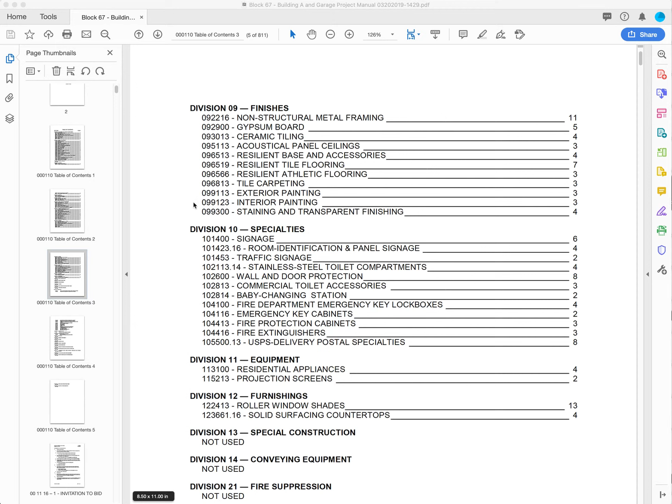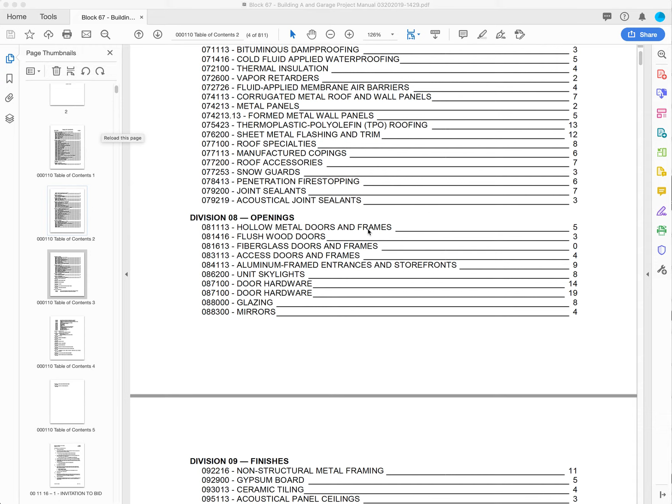There's also a section on wood, plastics, and composites—you can see all of these here. Then there's one on openings, so we've got hollow metal doors and frames, flush wood doors, fiberglass doors. This is just an example of what it could look like.

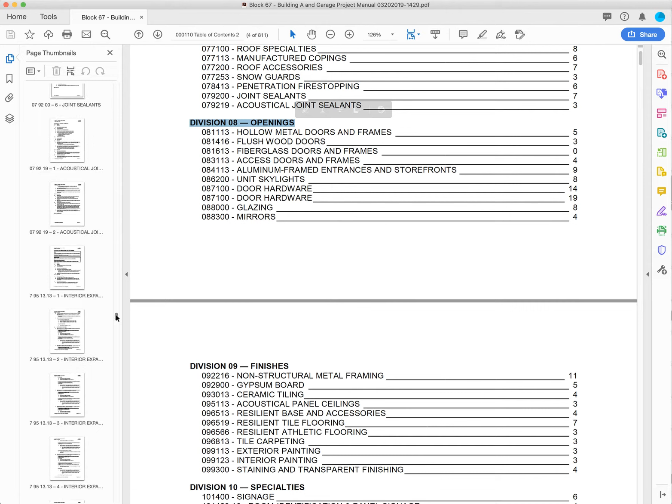So I'm going to hop down to Division 8 and show you what it looks like inside a specification section. I've got a bit to go here, and I'll probably just jump on the first spec I see, because once you've seen one, you've kind of seen all of them. So here is a specification for an overhead door.

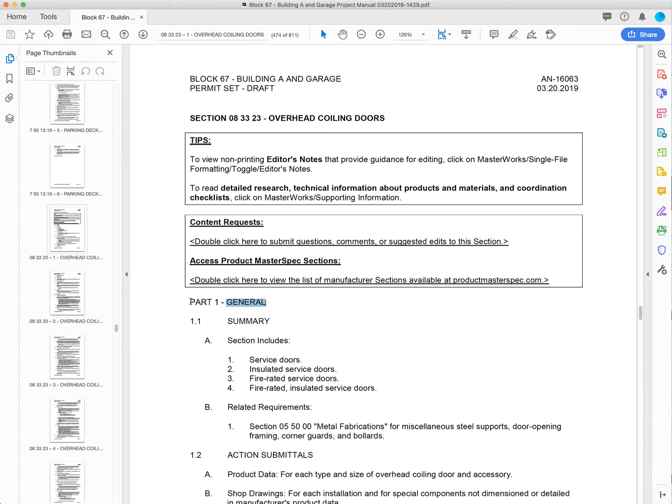This is section 08, which specifies the division, and then 3323. Every spec is in three parts: part 1 is general, and I'm going to skip down here; part 2 goes over the products, if there are any products being specified; and part 3 is the installation.

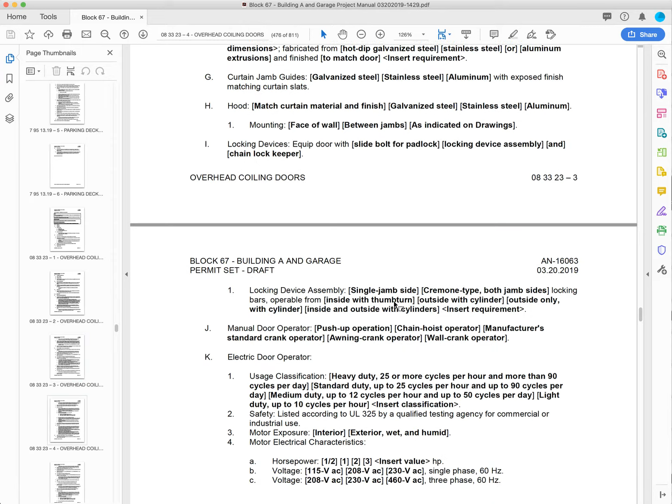I will get down here one day. Did I already skip it? No, I'm going to keep going. I'm going to keep scrolling—this is really embarrassing, guys.

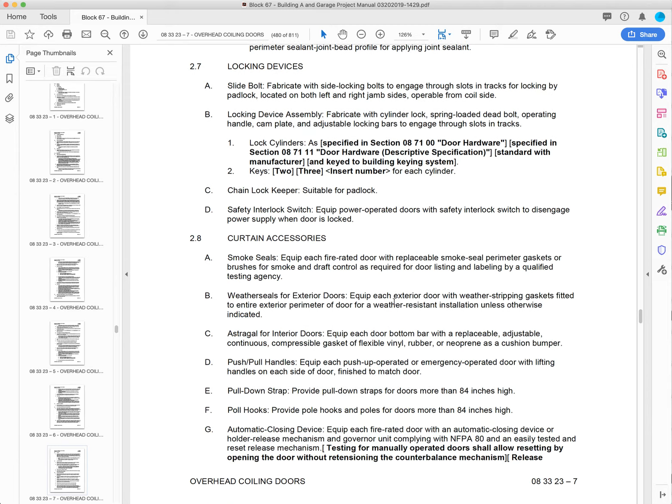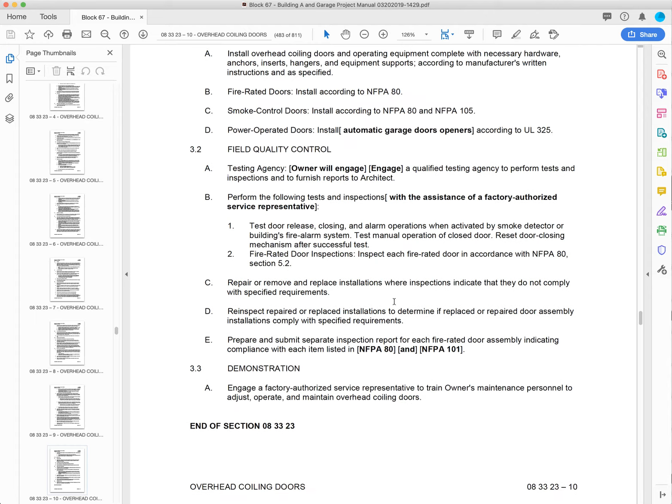So again, quick recap, every spec has 3 parts: part 1, general; part 2, products; and part 3, installation. Really what installation is, is a CYA clause, or a cover-your-bum clause.

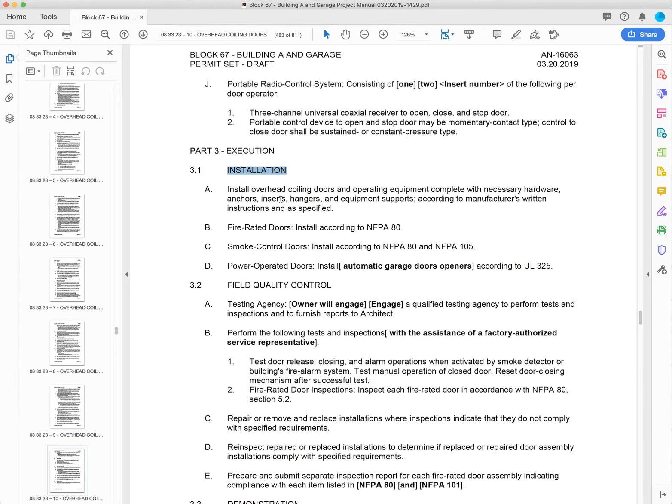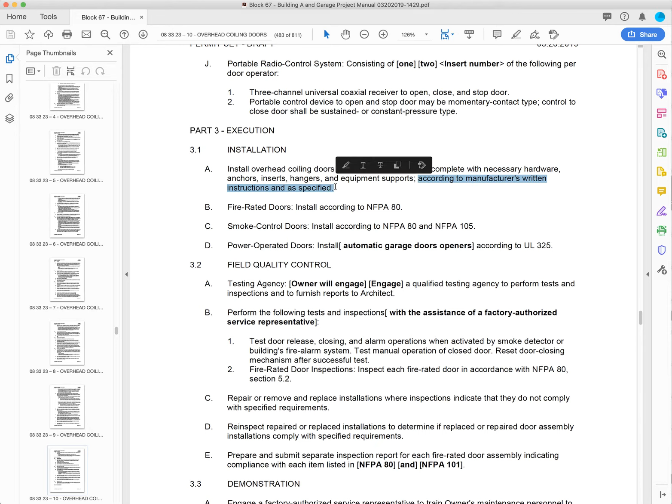So during construction and even after construction, if anything goes wrong, we can look at the specs and say, take a look, this is how we told you to install it. So even right here: install overhead coiling doors and operating equipment with necessary hardware, anchors, inserts, hangers, and equipment supports according to manufacturer's written instructions and as specified. That covers us, because as the architect we said, this is how you're supposed to hang it. So if it falls, we need to make sure you did it exactly according to the manufacturer's written instructions. And it kind of puts the liability right back on the contractor.

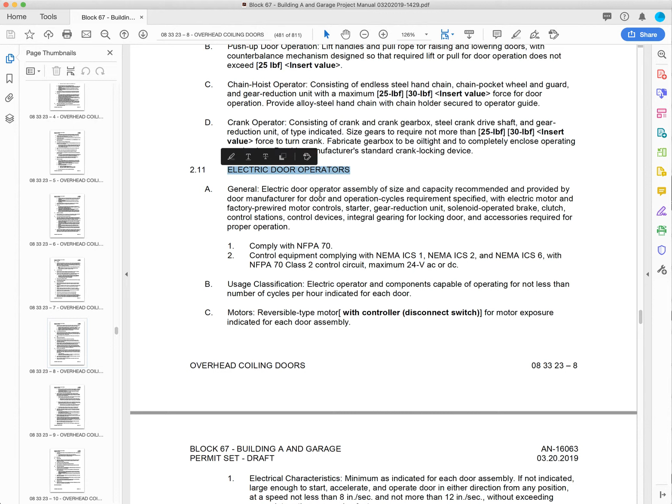So coming back up here, I'm going to scroll through the products just a little bit. Some of the products are the electric door operators. We've got manual door operators, a counterbalance mechanism. So all of these things go into the purchase of an overhead door.

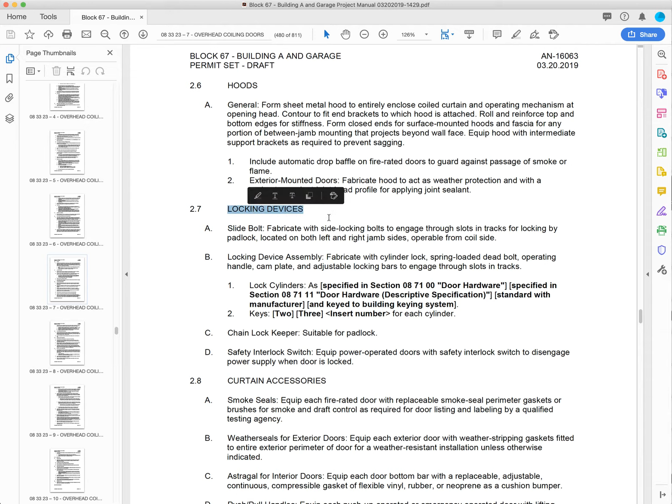You don't have to memorize all of these little nuances. The overall picture I want you guys to remember is that there are many different divisions of specifications, and we're going to memorize about a dozen to 20 of them, especially the first 14. And then each specification comes in 3 parts: part 1, general; part 2, products; and part 3, execution or installation. I may have called it installation, sorry, that's what I'm used to, but execution.

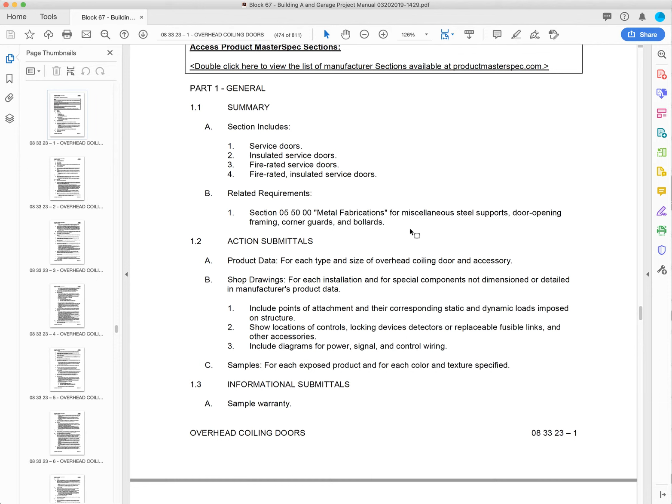Some other things that come up in installation or execution: they also go over how to prepare the space before and after the installation. So if you're about to do something really messy with some sort of adhesive, you'll go through the spec section and talk about how to prep the space before, whether it includes sanding or cleaning. And then afterwards, you also go through how to clean up the space after. So it's really interesting, all the different things that are involved.

So again, this is a spec section. If you're ever curious to actually hold one of these in person, we've got several sets on campus in the technology building, up on the 4th floor in room 403, I believe, or 405 - we've got all of our blueprints and some specifications. I hope that before the end of the semester I will get some specs that I can release to you guys. I've yet to get permission to publicly release any of these, but if I get my hands on some, I will definitely send them over to you.